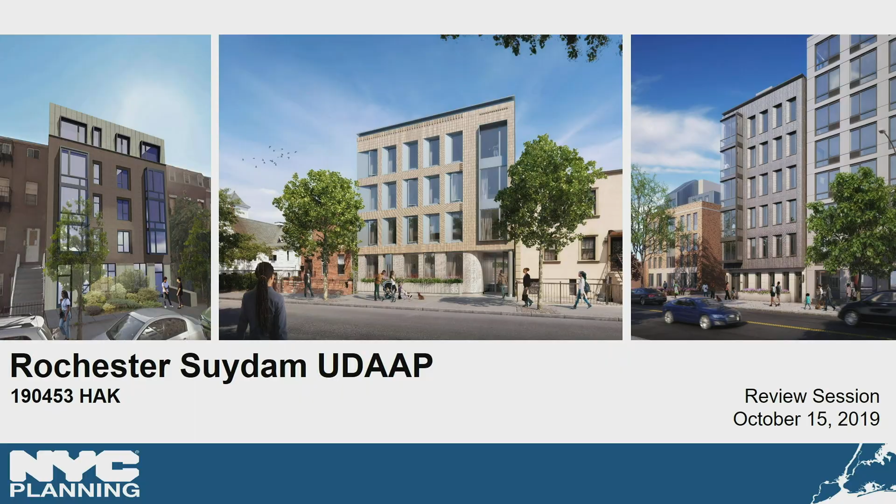Good afternoon, Commissioners. This is an application by the New York City Department of Housing Preservation and Development for a UDAAP designation, project approval, and disposition for 13 vacant city-owned lots to facilitate the construction of 7 residential buildings with approximately 78 units of affordable home ownership housing.

Can you turn your microphone down? Sure, is this better? The proposed developments are located in 3 clusters in the southern part of the Bedford-Stuyvesant neighborhood in Community District 3 in Brooklyn.

Broadly speaking, the project sites are in a mid-density residential neighborhood. They're all located between Fulton Street, which is a commercial corridor, and Atlantic Avenue, which is a main thoroughfare with elevated rail and auto-oriented uses. Significant institutions in the area include Interfaith Medical Center, just east of Cluster 1, and Boys and Girls High School, closer to the second cluster. All of the sites are well served by transit. As you can see on the map, they're all near subway stops, and they're also each near 2 bus routes.

Now we'll take a closer look at each of the clusters. Here we're looking at the westernmost cluster, which includes sites 1 and 2, located on Herkimer, just west of Albany Avenue. East of the sites is Interfaith Medical Center.

Much of the area around these sites, as well as the other sites in the application, was contextually rezoned in 2007 to the current zoning. Blocks along Fulton Street are generally zoned R7D with a C2-4 overlay, and the south side of Atlantic is largely zoned M1-1. The rest of the area is mapped with medium density residential and medium density contextual and non-contextual residential districts.

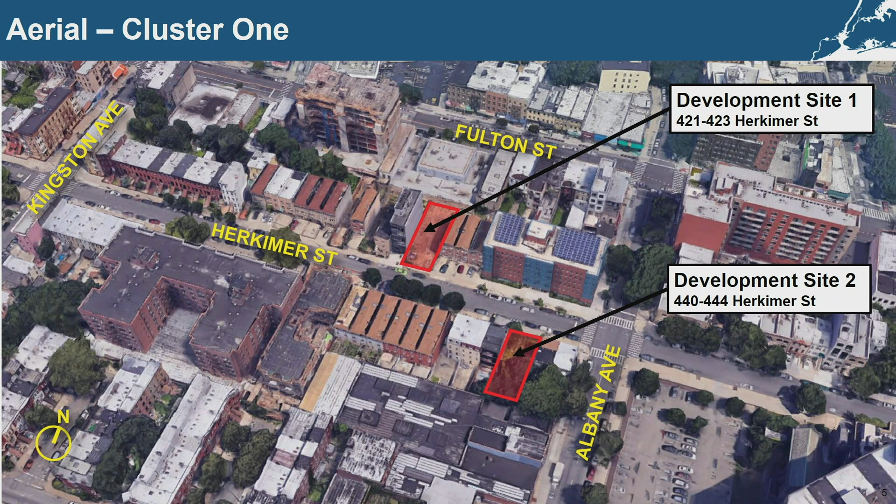Sites 1 and 2, seen here, are each comprised of 2 interior lots with 40 feet of frontage on Herkimer and a lot area of 4,000 square feet.

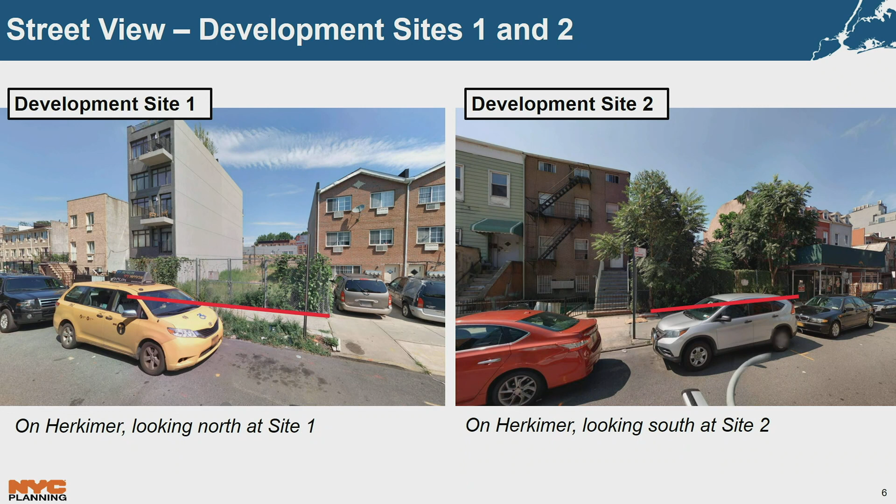The developments on these sites will be the same and built pursuant to R6A zoning. They'll be 52-foot tall, 5-story buildings with approximately 11,400 square feet and contain 10 units each. These will be 100% affordable buildings with a mix of 1- and 2-bedroom homeownership units.

All of the other developments in this application will also be affordable homeownership buildings with 1- and 2-bedroom units as well. Similarly, every building will also have an elevator and a landscaped yard that is accessible to all residents, and each unit will have its own washer and dryer.

Moving on to the next cluster, this is about a half-mile east of the last one and includes 3 development sites. The land uses here are generally the same, except the area also has a number of vacant lots. And instead of a hospital, the institutional uses here include a nursing home and several houses of worship.

The zoning here is also largely the same as in the previous cluster, though there's a small area along Atlantic that is zoned C4-3.

The sites in this cluster are all within an R6B zoning district, which allows 2 FAR for residential use and results in buildings with a street wall of up to 40 feet high and a maximum height of 50 feet.

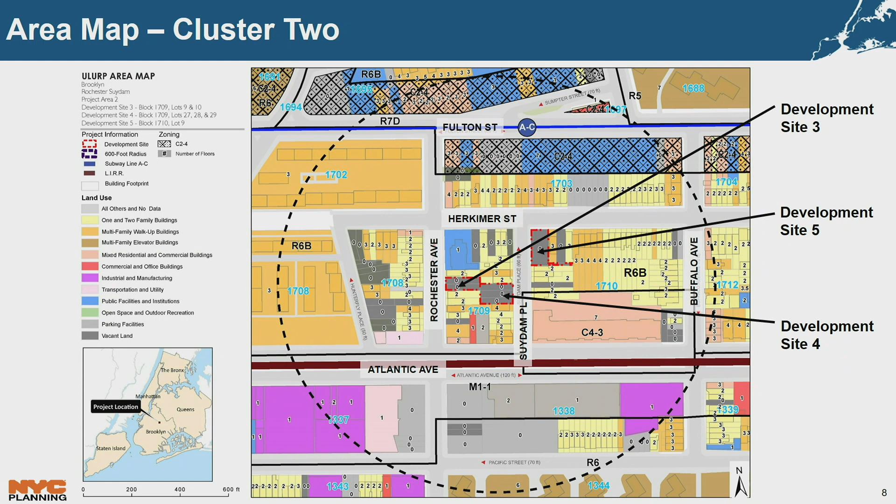Sites 3, 4, and 5 are all located just south of Herkimer Street on Rochester and Suydam Place. Most of the surrounding buildings are 2 to 4-story row houses and apartment buildings, but there are a couple 7-story buildings in the area.

So we're looking here at development site 3, which is located on the east side of Rochester Avenue, just south of Herkimer. It's comprised of 2 tax lots, has 42 feet of frontage, and an area of approximately 4,100 square feet.

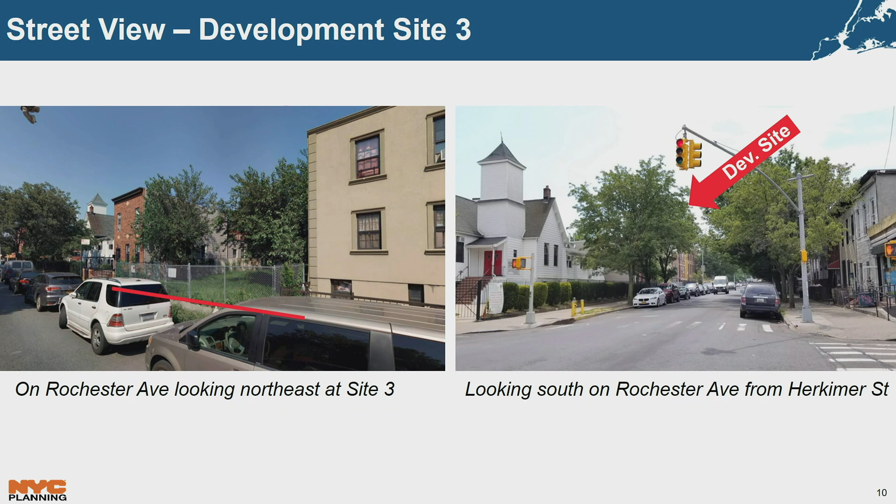The proposed development will contain 8 units and a 40-foot tall 4-story building that will total about 7,500 square feet.

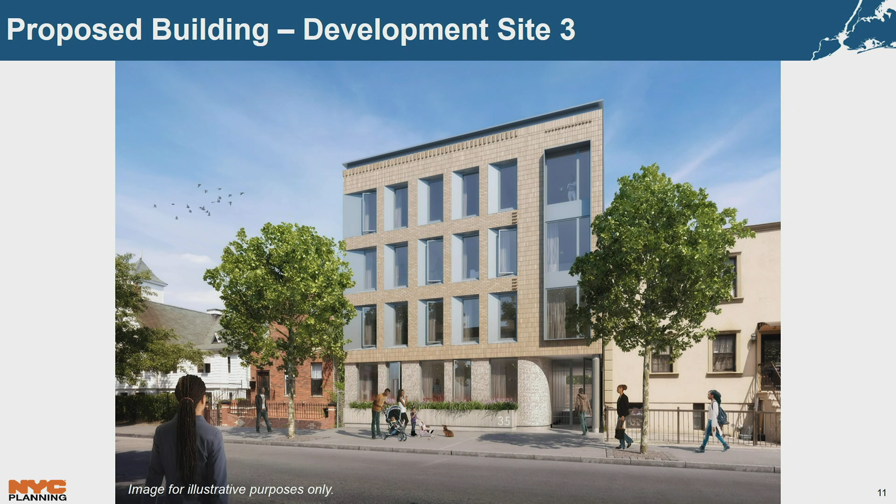The next site, number 4, is located on the same tax block but fronts on Suydam Place, 1 street east of Rochester. The site is made up of 3 tax lots with 63 feet of frontage and has about 6,100 square feet.

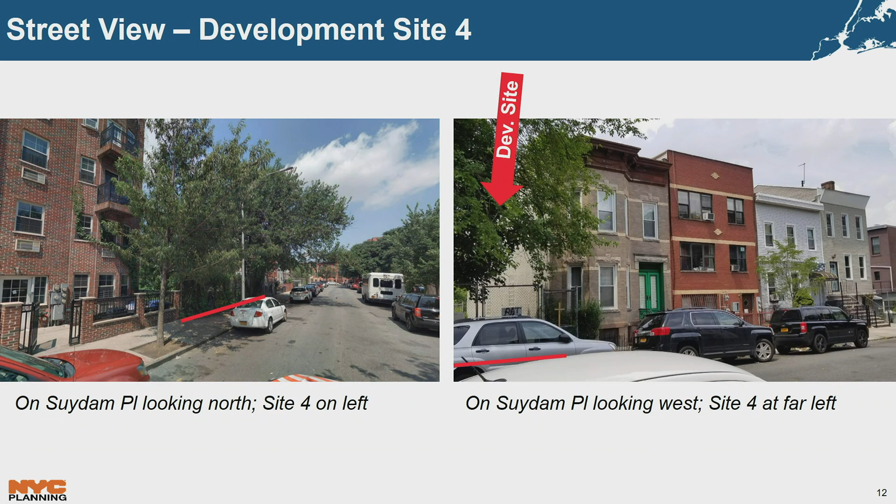The proposed development on Site 4 will contain 15 units and a 40-foot tall 4-story building with about 11,700 square feet. A zoning override was obtained for this development to waive the 8 parking spaces that would be required by zoning.

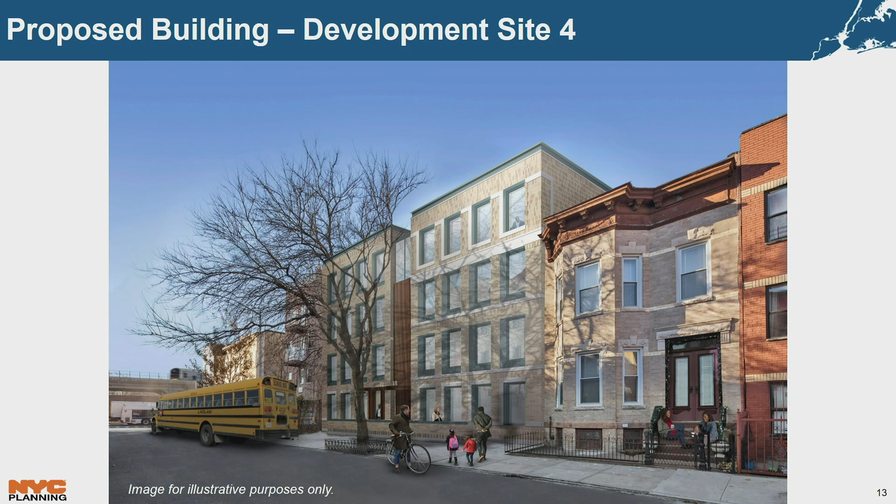Now, across the street and to the north is Site 5, which is an irregular corner lot with 52 feet of frontage on Herkimer Street and 105 feet along Suydam Place. The site area has a lot area of just over 6,000 square feet.

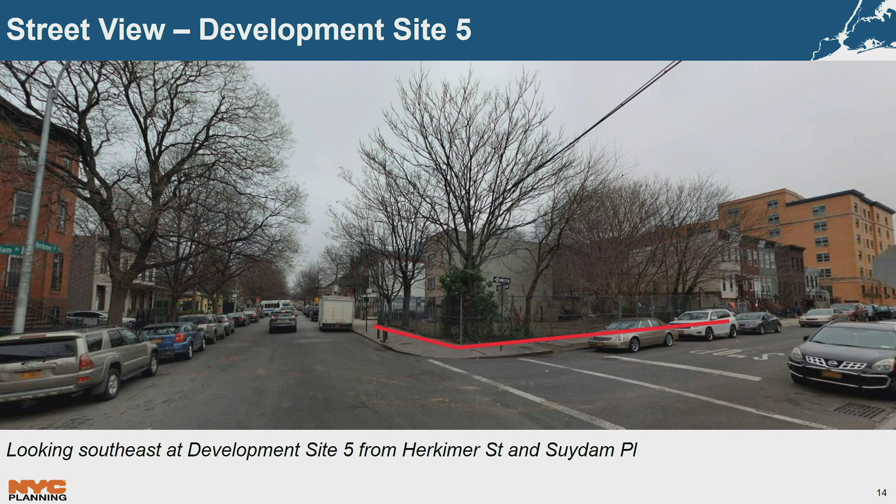The development for the site will also be a 40-foot tall 4-story building with approximately 10,700 square feet, and it will have 12 units. A zoning override was also obtained for this development to waive the 6 parking spaces that would be required by zoning.

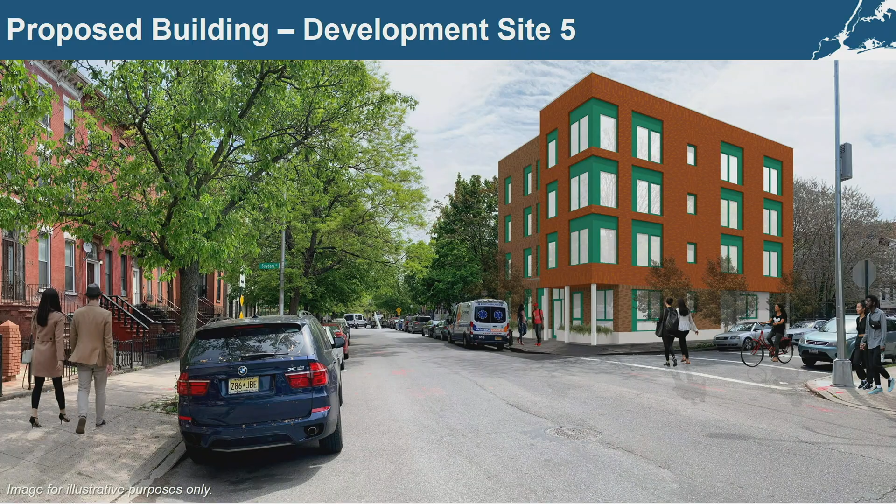So the last cluster includes 2 development sites and is located about 1/4 mile east of the previous one. The land uses here are similar to the previous cluster as well.

In terms of zoning, this area has an MX-10 special district with M1-1 and R7D districts mapped along Atlantic. And then there's also an inclusionary housing designated area that is coterminous with this special district.

Here, the development site 6 is in an R6B district, so it's subject to the same bulk regulations as sites 3, 4, and 5 that we just looked at.

Site 7 is within the MX10 Special District and is subject to the base bulk regulations of R7D districts. This allows for 4.2 residential FAR and 10-story buildings with an 85-foot base height and a 100-foot maximum building height.

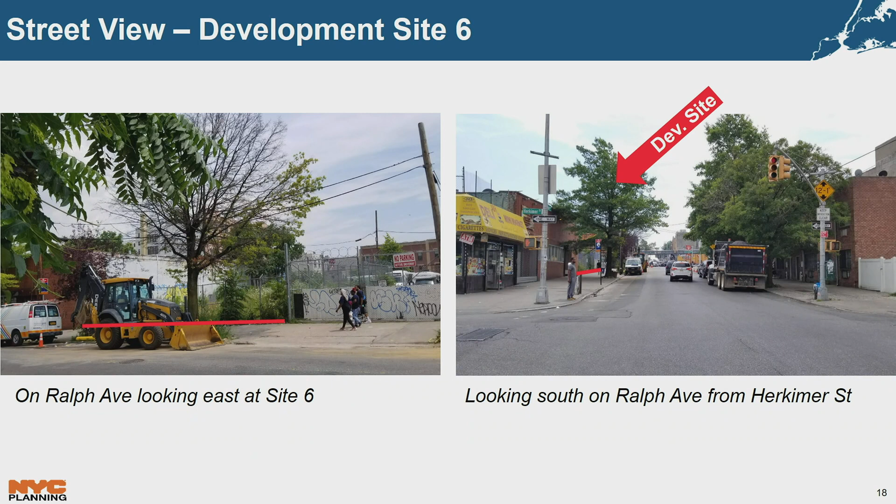Looking closer at site 6, this is made up of 2 lots with 50 feet of frontage and approximately 4,500 square feet of lot area.

The development that's proposed for the site is subject to the R6B zoning regulations and will be a 5-story building that's 49 feet 6 inches tall with 10 units and approximately 8,600 square feet.

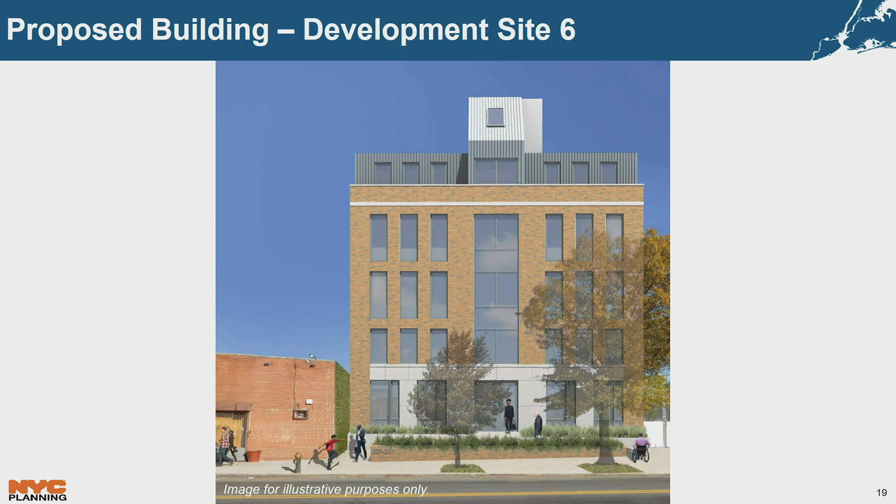The last site, which is on the same block, has 34 feet of frontage and an area of approximately 3,000 square feet.

This development will be built pursuant to the basic non-inclusionary housing regulations for R7D zoning. The development will be a 7-story building that will have a base height of 62 feet and a total height of 72 feet. It will contain 13 units and have approximately 12,200 square feet.

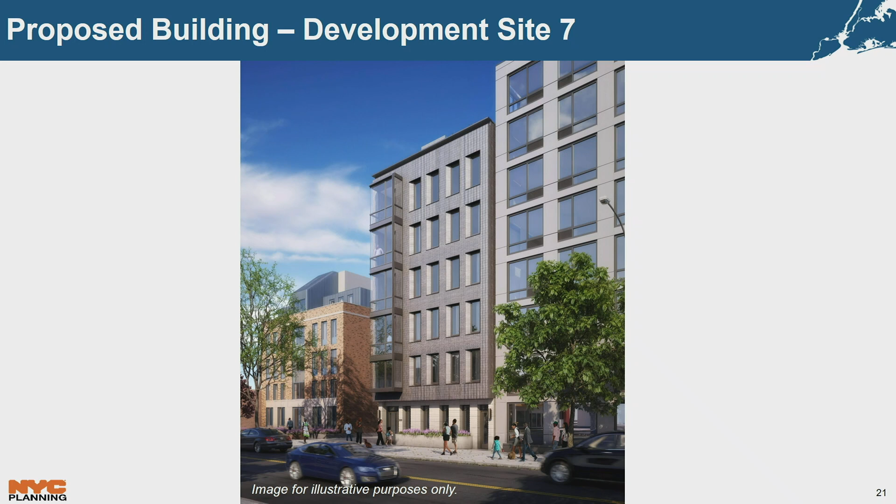So just to summarize, this application is for a UDAAP designation, project approval, and disposition of 13 city-owned lots to facilitate 7 developments with approximately 78 units of affordable homeownership housing. I'll now take any questions.

Questions from the commission? Vice Chair Nichols. Thank you. These would be condominium units as a home ownership, or has that been determined yet?

I can have the applicant speak to that. Okay, and affordability levels, you mentioned 100% affordable. What does that mean in terms of AMI? So these developments are all being built under the NIHOP program, which has an AMI range of between 80 to 130% AMI.

And do you know the AMI of the local area? The Bed-Stuy, the median household income of Bed-Stuy is $43,000.

Commissioner Burney. Could you just go back to the Herkimer Street, the renderings of the Herkimer Street? Just because I saw that first. Sure. Yeah, that's fine. So, I mean, I've mentioned this before, but I just have a lot of concerns about

the planting in front of these buildings, because we have a very poor track record of these things surviving. They're never well maintained, and they just become a nuisance. And I'm all for planting some trees on the sidewalk, and I understand they're probably concerned about screening the residential units that are there, but these planters are just not really a good solution.

I can definitely take that concern to the applicant. Other questions?

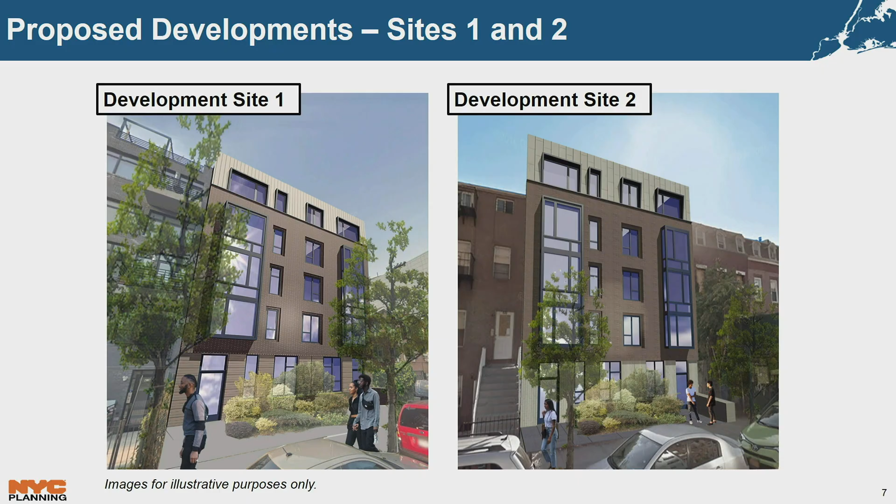Commissioner Levin. Is there a developer or developers chosen yet? Yeah, the development team is a partnership between Job Development Corporation, Fulcrum Properties, and the Briarwood organization.

Okay. And is there a possibility that sites 6 and 7 get combined? Is there a vacant space in between the two of them? That lot is part of a lot that extends to the other side of the block.

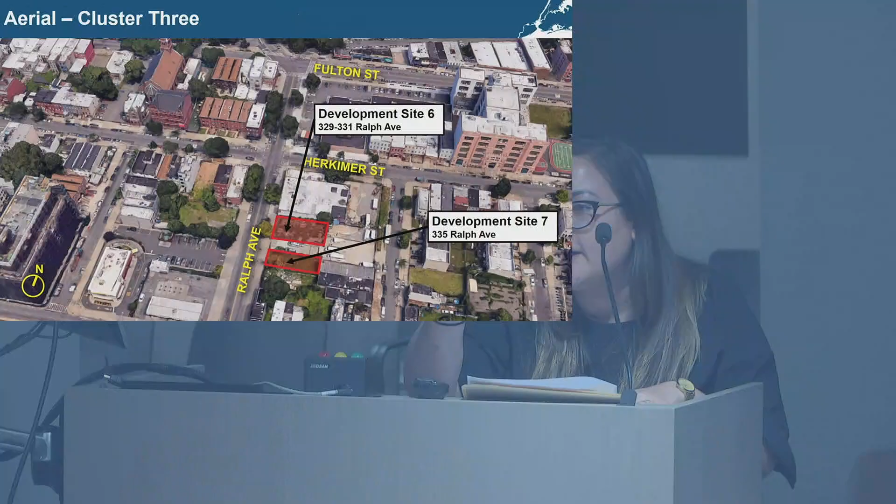I can definitely call it up on the screen, sure. Yeah. Oh. Well, that kind of shows it, yes. So that lot is part of a lot that extends to the other side behind development site 6 that's currently used for parking of large trucks. Okay. So it may have some potential, or maybe it doesn't.

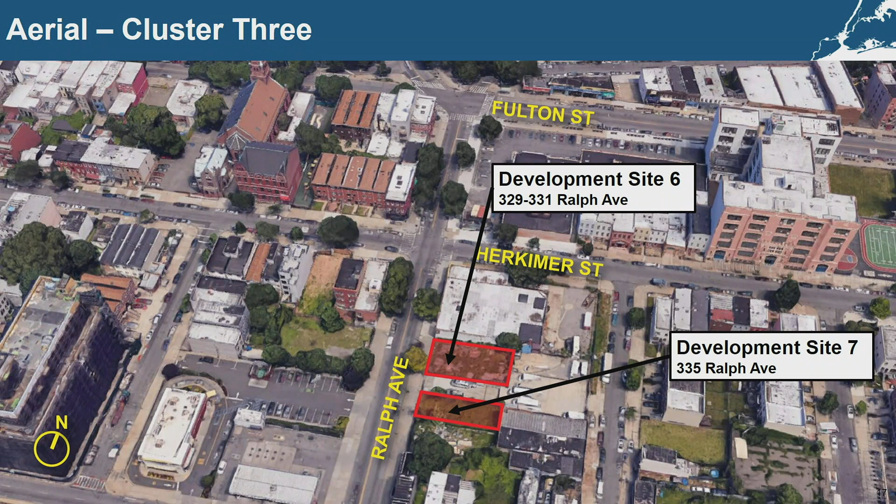It's not city-owned in any event. Okay. Thank you. Commissioner Villalobos. Can you go to site 6 and 7 for a sec? The area map, not the rendering, the area map that kind of shows the little piece of, next one over, I think.

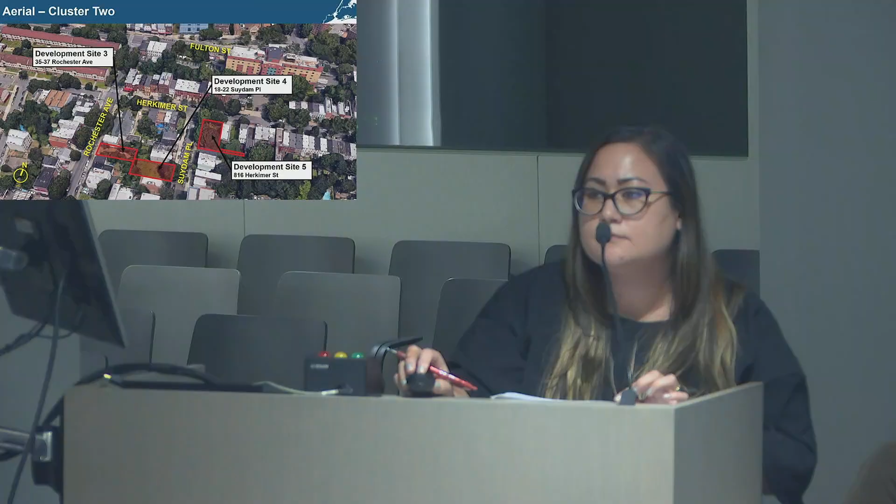This one? I guess it's actually 3, 4, and 5, I'm sorry. Okay, there you go, that one. So the little piece of land that's going into the adjacent yard, I'm assuming that there's actually not going to be development on that, and instead the little bit of FAR is going to be transferred. Is that what's happening? For site 5?

Yeah, 816 Herkimer? Yeah. So that little piece of land extension, on the south, that's part of the yard. The development is located more on the northern part of the site. I guess the question is whether it's going to actually be used or not, so if that question can be answered when it comes back. Yeah. Thanks.

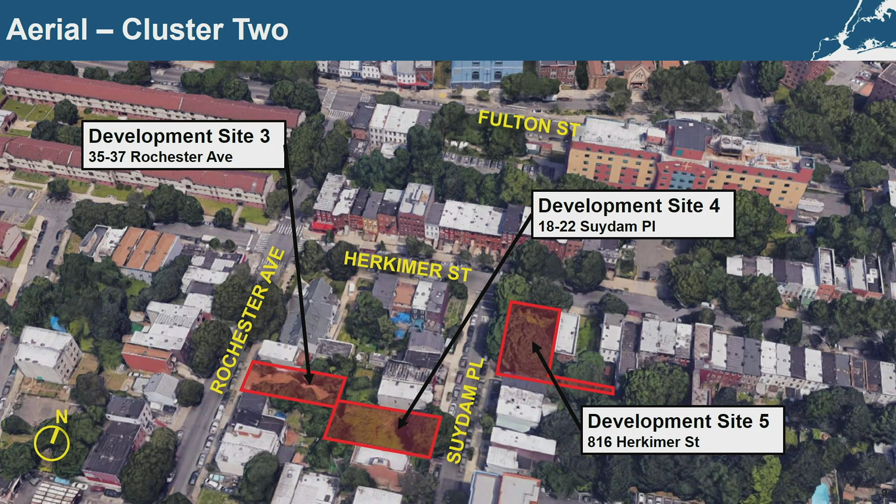Other questions? Okay, the application is certified.

The second item on the agenda, page 60, is a certification of zoning map and zoning text amendments in Brooklyn Community District 2. Our presenter is Kevin Kraft.

All right. Good afternoon, Commissioners. This is a private application by 90 Sands Street Housing Development Fund Corporation, an entity controlled by Breaking Ground, a nonprofit provider of supportive and affordable housing, requesting a zoning map amendment and zoning text amendment to facilitate the conversion of an existing 29-story former hotel to supportive and affordable housing classified as a community facility use.

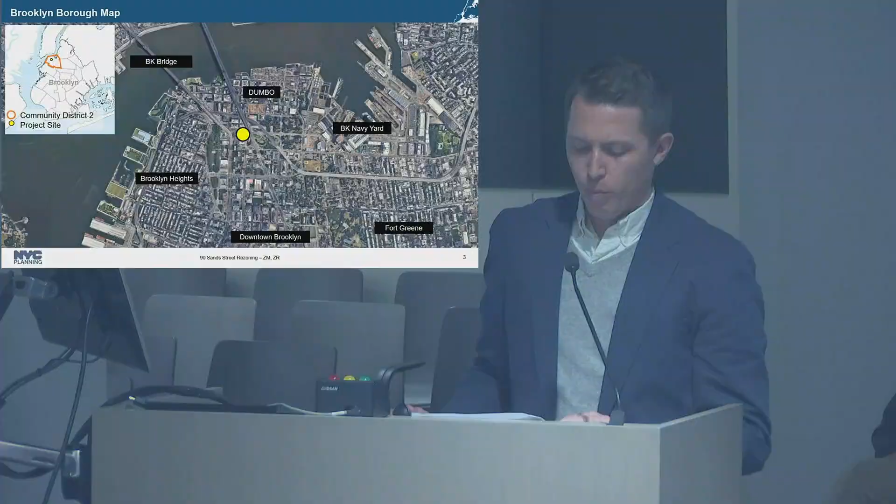The proposed project area is located within the Dumbo neighborhood of Brooklyn, Community District 2. The site is located between the Manhattan and Brooklyn bridges, just north of downtown Brooklyn.

The proposed rezoning area is an approximately 42,000 square foot single block that consists of 2 tax lots, Block 87, lots 5 and 9. Lots 5 and 9 are under separate ownership and comprise a single zoning lot that has an allowable FAR of 11.08. The block is bounded by the 160-foot wide Sands Street to the north, Jay Street to the east, High Street to the south, and Pearl Street to the west.

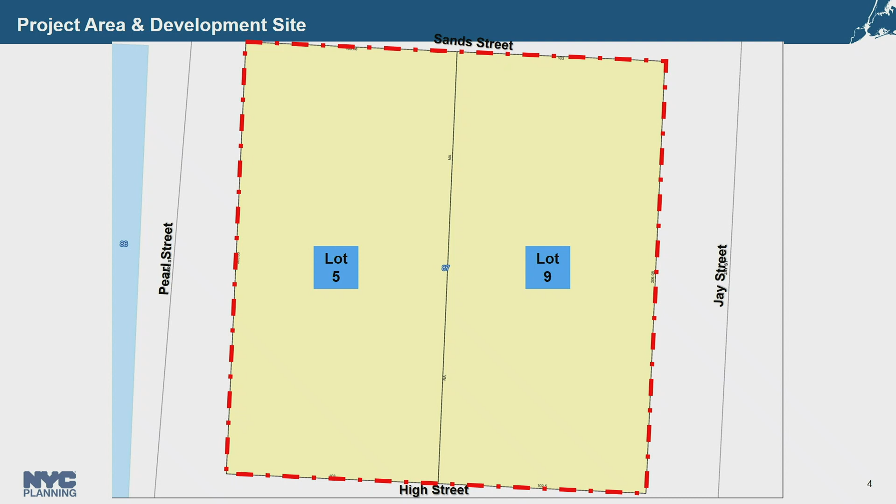The applicant-owned site, Lot 9, is an approximately 21,000 square foot lot currently occupied by the 90 Sands Street building, a vacant 29-story, approximately 329-foot tall building built in 1993 by Watchtower, an organization of the Jehovah's Witnesses. The building was formerly used as a hotel to house Watchtower members. There are a total of 508 units, as well as a commercial kitchen, all of which are vacant.

There is also an existing 7,600 square foot public plaza on the eastern portion of the lot along Jay Street. The provision of the plaza permitted a 1.08 FAR bonus to the zoning lot. Lastly, in 2018, the applicant and HPD recorded two regulatory agreements against Lot 9, requiring that the existing building

be rehabilitated and used for supportive and affordable housing. Lot 5, the non-applicant-owned site, is an approximately 21,000 square foot lot with frontage on Sands, Pearl, and High Streets.

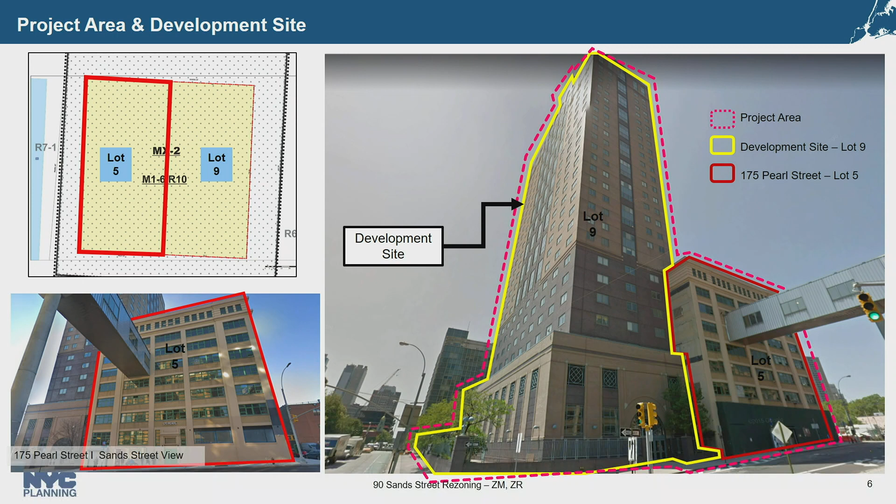This lot is developed with an 8-story commercial loft building that was renovated into a Class A office building in 2017, and is part of the larger Dumbo Heights office complex to the north, connected by an existing sky bridge across Sands Street. This lot is not expected to redevelop due to the proposed zoning change.

The surrounding area contains a mix of uses, including medium and high-density residential, commercial, and community facilities. Commercial office uses are concentrated north of the project area, primarily located in medium to large loft buildings. Dumbo Heights, a 5-building, 1.2 million square foot campus comprised of office, retail, and high-tech space, home to companies such as Etsy, is located within the project area and north of it across Sands Street.

Immediately to the south, across High Street, is the New York City College of Technology CUNY Voorhees Hall, an 8-story academic building. To the west is the 3-story academic building that houses CUNY's Environmental Center. Beyond Adams Street is the New York City Emergency Management Department offices, and further to the southwest is the U.S. District Court.

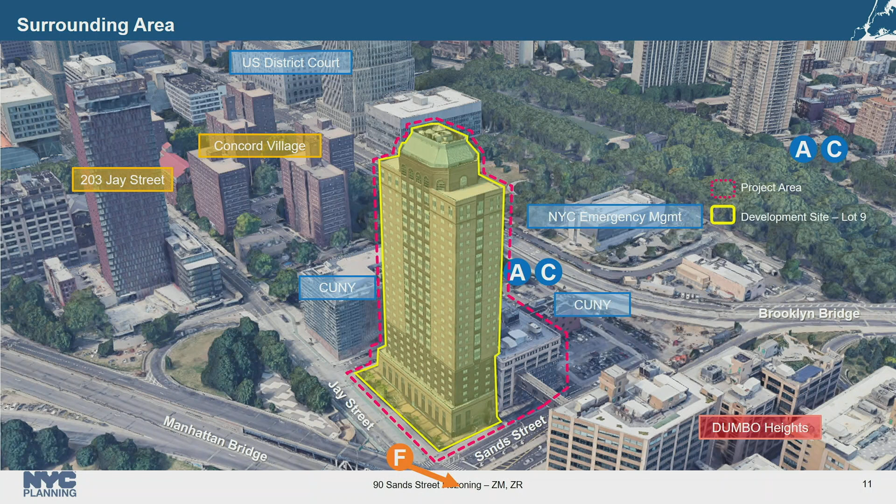To the south is Concord Village, a roughly 1,000-unit condo complex of 7 15-story towers surrounded by parking lots. Southwest of the project area is 203 Jay Street, a 33-story residential building with a hotel in the base, constructed in 2015.

Open spaces in the area include Trinity Park. Directly across Jay Street from the project area is Manhattan Bridge Small Park. Approximately 4 blocks to the southwest is the roughly 3-acre Walt Whitman Park. Further west is Cadman Plaza Park, a 10.3-acre park.

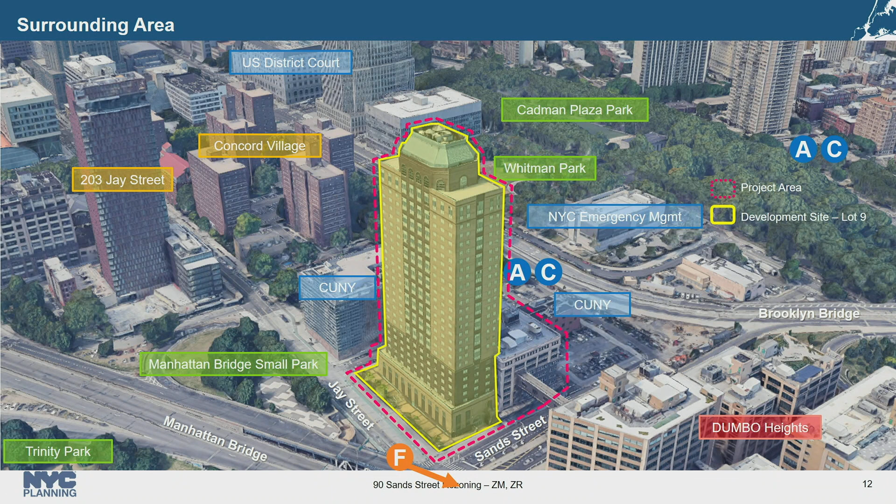The area has access to the F train at the York Street Station 3 blocks to the north, as well as the A and C trains at the High Street Station, which is less than a block to the west. The area is also served by the B67 and B69 bus lines.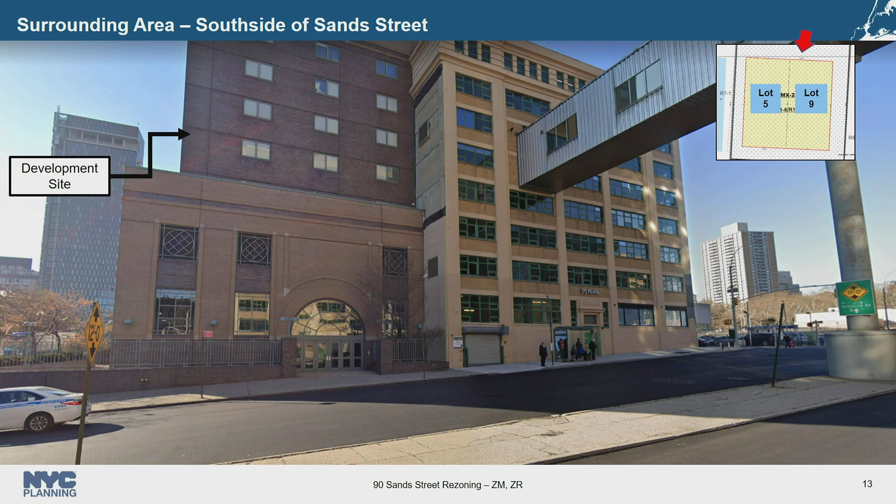This is a view looking at the south side of Sands Street at the project area. On the left-hand side you have the development site, and on the right-hand side the office building located on Lot 5. You can see the bridge crossing over Sands Street.

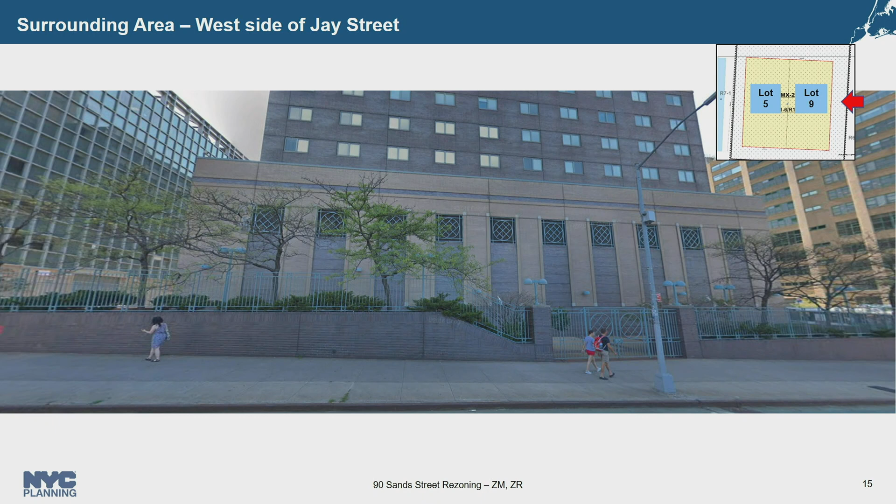This is looking at the west side of Jay Street at the existing plaza that's currently gated, but it is the applicant's intention to open it up for public use. They'll be coming forward with a chairperson certification in the future, and are currently still working on the design of that space.

This is looking at the east side of Jay Street at Manhattan Bridge Small Park, as well as the pedestrian entrance to the pedestrian pathway on the bridge.

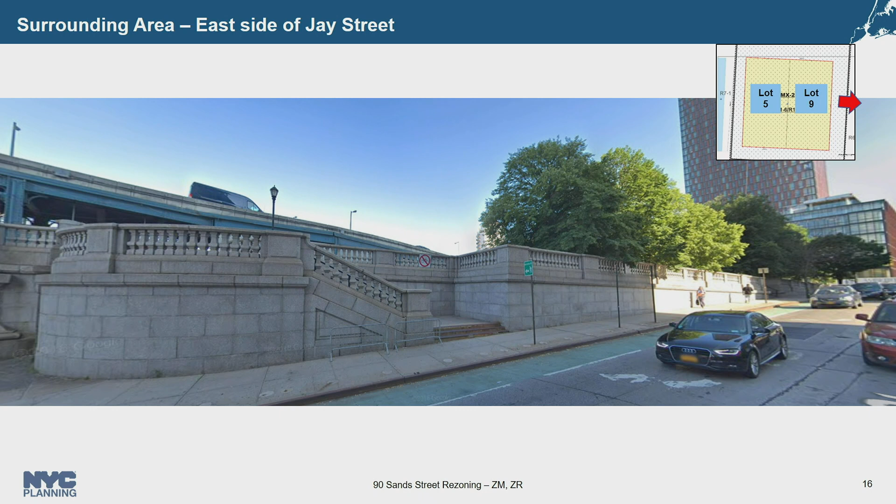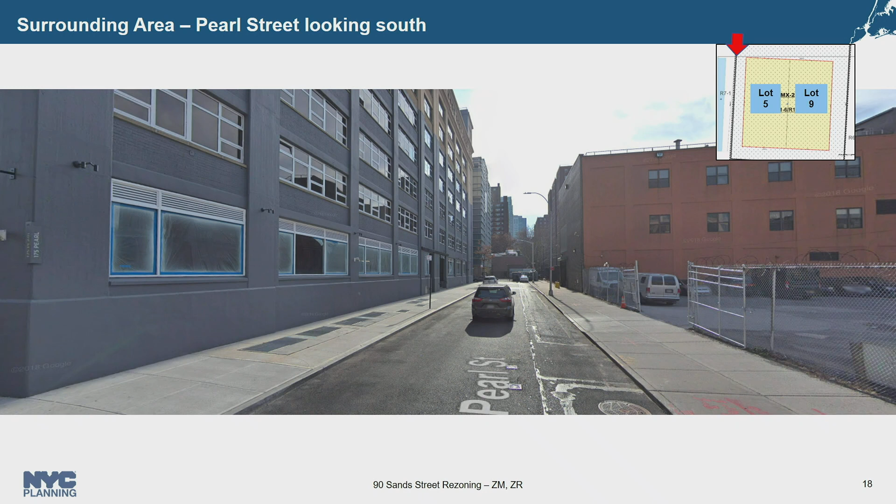The project area and immediate blocks to the north are located within an M1-6 zoning district. M1-6 districts allow a variety of commercial and light manufacturing uses, as well as heavier industrial uses subject to stringent performance standards. Building heights are regulated by a sky exposure plane that begins at 85 feet above the street line.

Further to the north, beyond the elevated Brooklyn-Queens Expressway, is the MX2 Special Mixed-Use District in Dumbo. This was established in 1999 as Brooklyn's first special mixed-use district. Non-contextual residential R7-1 and R7-2 districts are located to the south and west of the project area.

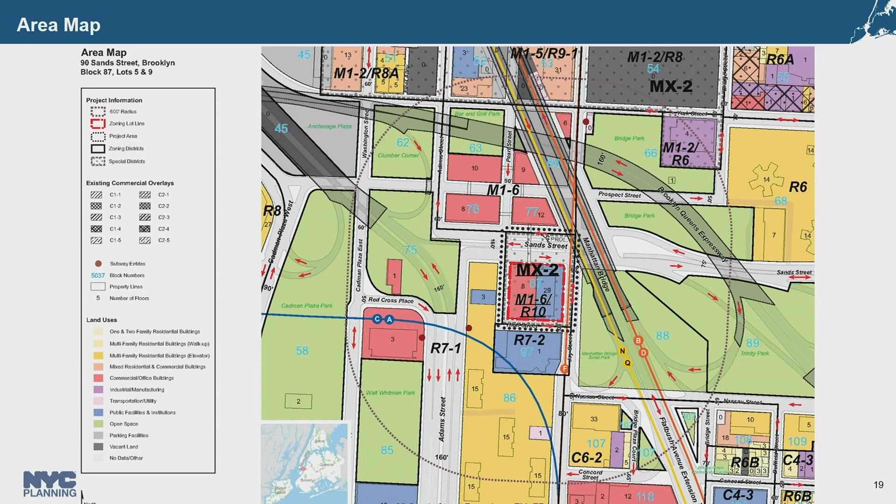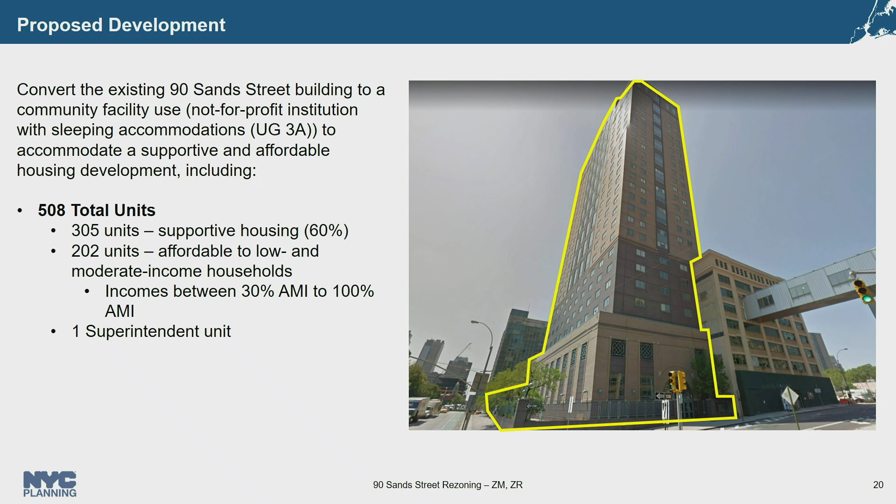The applicant is proposing to convert the existing 90 Sands Street building on Lot 9 to a community facility use to accommodate 508 units of supportive and affordable housing for low and moderate income tenants. The proposed project would include 305 units, 60% for supportive housing for the formerly homeless, and 202 units affordable to low and moderate income households with incomes ranging from 30% AMI to 100% AMI.

The lower floors would be renovated to create tenant amenities and office space for the building management and social services. This would include a reception desk with security staff on site 24/7, along with a community room for use by building residents. Other amenities would include a laundry room, fitness room, and computer lab.

In addition, the applicants intend to lease the lower cellar level to a tenant that would provide a community facility, commercial or light industrial use, but that tenant has not yet been identified.

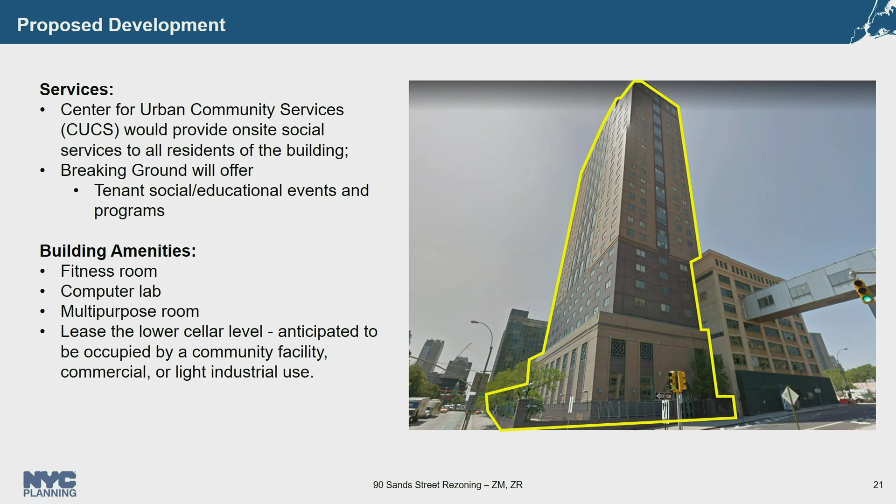The Center for Urban Community Services would provide on-site social services to residents of the building, including case management, primary medical care, mental health services, employment readiness guidance, and benefits counseling. And as I mentioned, the applicants will be seeking a chairperson certification to update the public plaza.

In order to facilitate the proposed project, the applicant is seeking the following actions. First, the applicant proposes a zoning map amendment to rezone the project area from M1-6 to an M1-6/R10 district within a special mixed-use district.

The proposed mixed-use district would expand the range of permitted uses and would allow the existing 90 Sands Street building to be occupied by a Use Group 3A, community facility nonprofit institution with sleeping accommodations, which is not currently allowed in the M1-6 district. The proposed mixed-use district would maintain the existing permitted base FAR of 10, or up to 12 for including a public plaza or arcade.

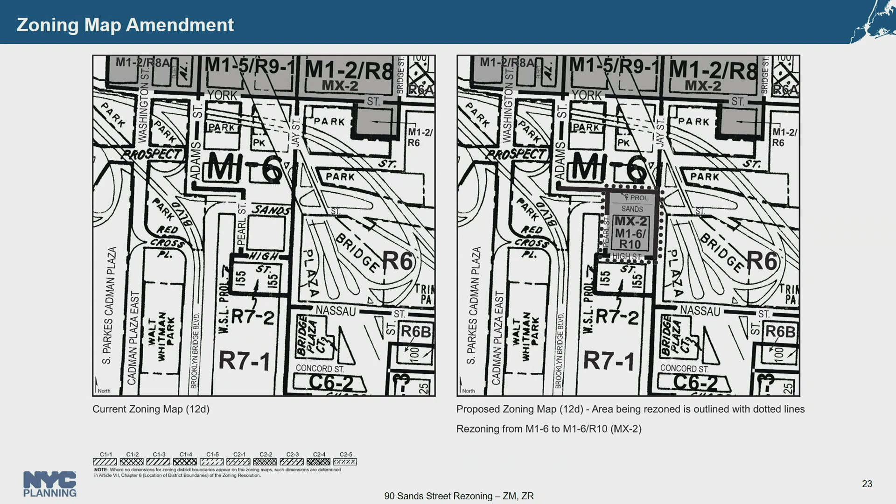Any residential use would be required to include MIH affordable units at 12 FAR. And lastly, the applicants are proposing a zoning text amendment to Appendix F of the zoning resolution to create a mandatory inclusionary housing area coterminous with the proposed rezoning area.

The applicants are proposing to map both MIH Option 1 and 2. However, it should be noted the applicant's proposal is not subject to MIH because they are classified as a community facility use. Thank you, happy to take any questions.

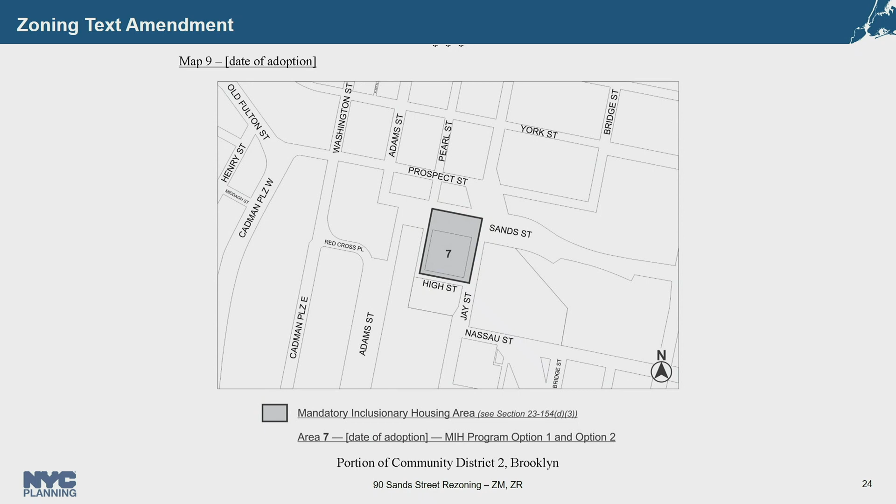Questions from the commission? Commissioner De La Uz.

First, I think this is a great use for this building, considering the need that exists for supportive housing and affordable housing. And what the past use was, I'm hoping that means the cost per square foot isn't that big a deal.

I heard what you said about since this property, this project won't be subject to MIH, I'm just wondering then why we're thinking of mapping 1 and 2 in the event that the adjacent property in some future were to be redeveloped. It seems to me that the greatest need would continue to be for the more deeply affordable option rather than 2, especially given this community board. So that's the one thing I would ask HPD and the applicant to consider as it moves forward.

Do you want to give some history of the site? Yeah, I'd be happy to. The Lot 5 office building, as I mentioned, was redeveloped in 2017 as Class A office space, so it's highly unlikely. So mapping both options now just allows a little bit more flexibility should a future residential use want to come in the future.

But we could, definitely relay it to prior HPD use of the current building. Hotel. Okay, I'm very well aware. I just wanted everyone to be aware that it's very well configured because of its prior use.

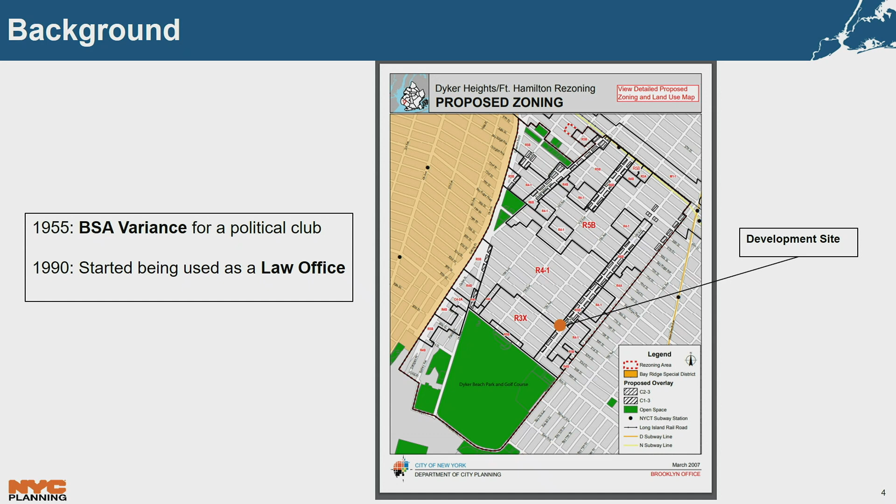Just clarifying, the BSA variance was not for use. The use was permitted at the time. This is pre-1961, and the certificate of occupancy lists it as a club. So the variance was for the bulk. At the time, the maximum permitted area was 55%, and the existing building uses close to 72%.

So the project area is comprised of 3 lots, approximately 10,000 square feet. The development site is marked in red and has a 40-foot frontage along 13th Avenue and 100 feet deep, comprising 4,000 square feet.

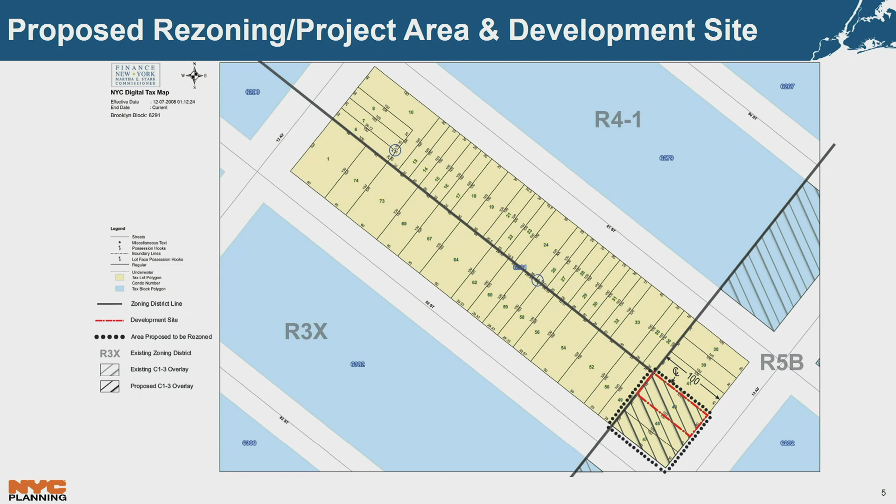The surrounding land uses are mostly residential, 2 to 3 stories, comprising single-family homes, detached 2 to 3-storied single-family homes, and 3-storied row houses. Community facilities in the area include Junior High School 201 just a block to the northwest. Just south of the project area is the Dyker Heights Library, and diagonally across is a house of worship. Just a couple of blocks down is the post office, and 4 blocks south is the 214-acre Dyker Beach Park, which contains recreational facilities, sports fields, and also a golf course.

The existing zoning is R5B, which is primarily a 3-story contextual residential district, permitting detached and semi-detached row houses, with a maximum of 1.35 FAR and a maximum building height of 33 feet.

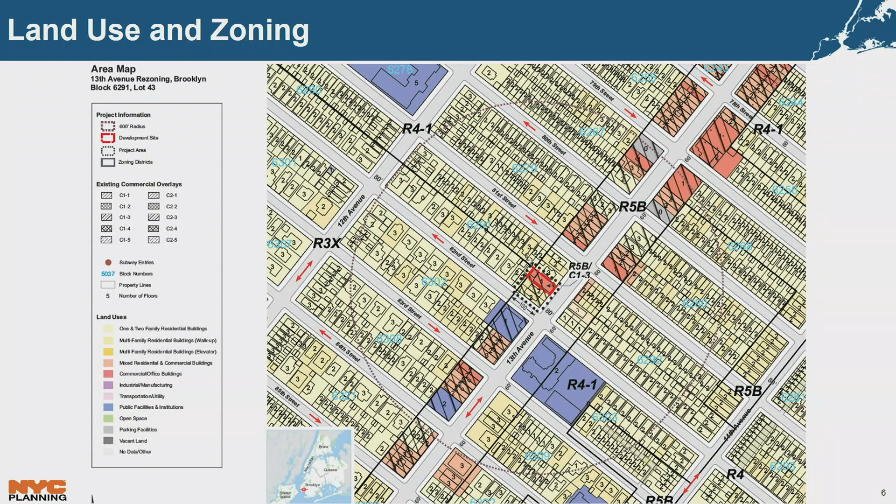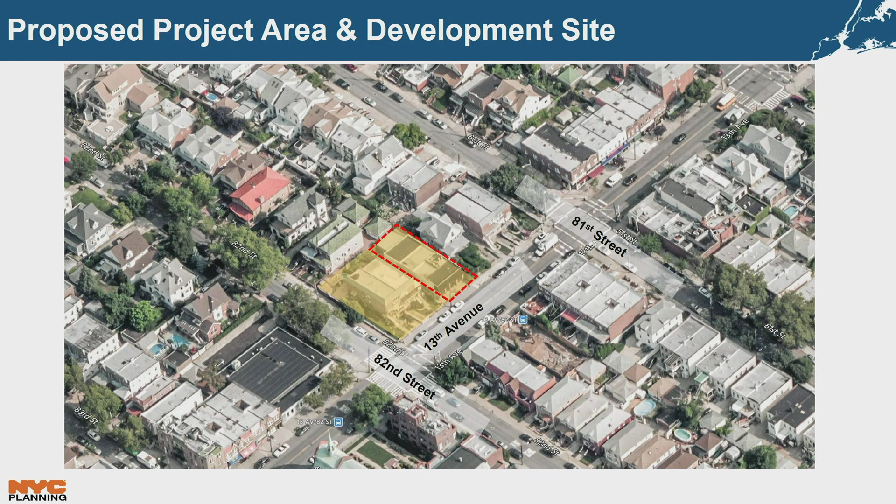This shows further the character of 13th Avenue, which is a very nice street thoroughfare. It's a wide street, with local retail made of restaurants, salons, and medical offices. The applicant states that the existing use, which is a law office, would be in context and consistent with the rest of the character of the uses along 13th Avenue.

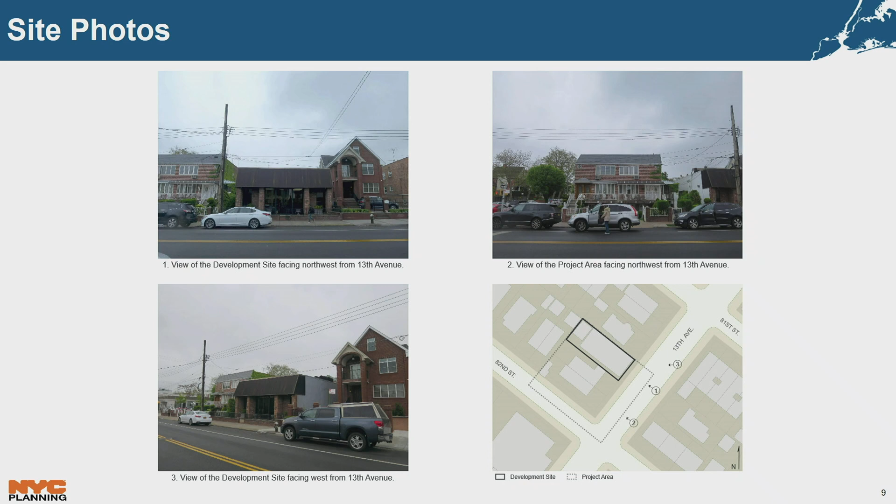In order to facilitate the legalization of this law office, the applicant is proposing a zoning map amendment to allow for mapping a C1-3 commercial overlay over the existing R5B district. The proposed zoning would not increase the maximum permitted commercial FAR or the maximum permitted FAR for this site, or change the bulk residential regulations as they currently exist. In closing, the applicant is seeking the proposed rezoning to facilitate the continued use of a productive law office which serves this community. Thank you.

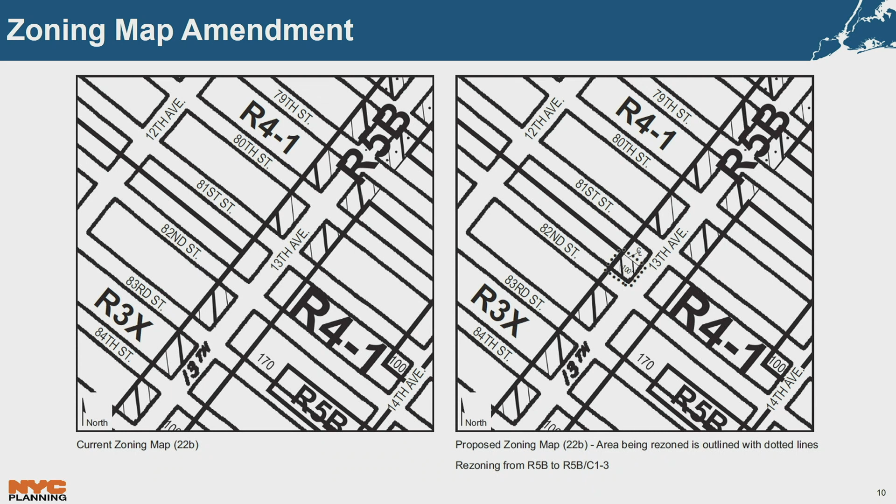Questions from the commission? Commissioner Levin: Thank you, Sanmani. I'm just curious, why now? The applicant's father passed away in 2013, and sometime after, the applicant's mother was going through the paper records, found the certificate of occupancy, and found out that the law office, which was at the time allowed, is no longer conforming. They just wanted to straighten out their affairs.

And then probably the bigger question is, if you look up and down that whole block, why doesn't this block have the commercial overlay? It's because this is the only commercial use on the block. Right, and so at that time it must have been left out. Okay, good, thank you. Usually we have concerns when we see an application after the fact, but this one actually brings a smile to your face, of the widow wanting to do the right thing.

Other questions? Okay, the application is certified. Thank you.

The fourth item on the agenda, page 96, is a certification of a zoning map and zoning text amendments in Queens Community District 2. Our presenter is Scott Solomon.

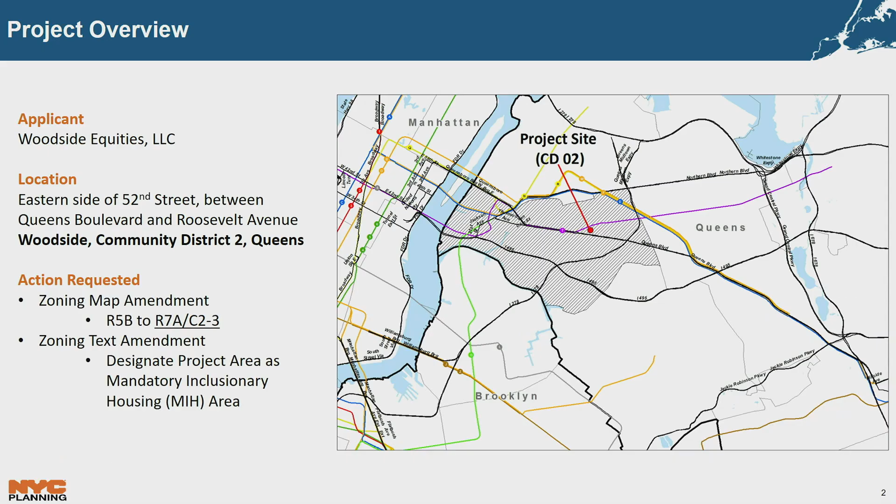Good afternoon, Commissioners. Woodside Equities LLC seeks approval of a zoning map amendment for the entirety or portions of 11 tax lots from an R5B to R7A C23 district to facilitate development of an 8-story mixed-use building in the Woodside neighborhood of Queens Community District 2.

A zoning text amendment is proposed to designate the area as a mandatory inclusionary housing area.

Brief background: the project area, located on the eastern side of 52nd Street between Queens Boulevard and Roosevelt Avenue, was rezoned from R6 to R5B in 1992 as a result of the city-sponsored Woodside rezoning. In 2006, the Maspeth Woodside rezoning changed the M1-1 district west of the project area to R6 C23 and the C8-1 along Queens Boulevard to R7X with the C23 overlay. It also established the borough's first inclusionary housing designated area along the R7X corridor along Queens Boulevard. The project area was not affected.

Following in 2011, the Sunnyside Woodside rezoning added density with contextual components to the areas north and west of the project area. Again, the project area was not affected.

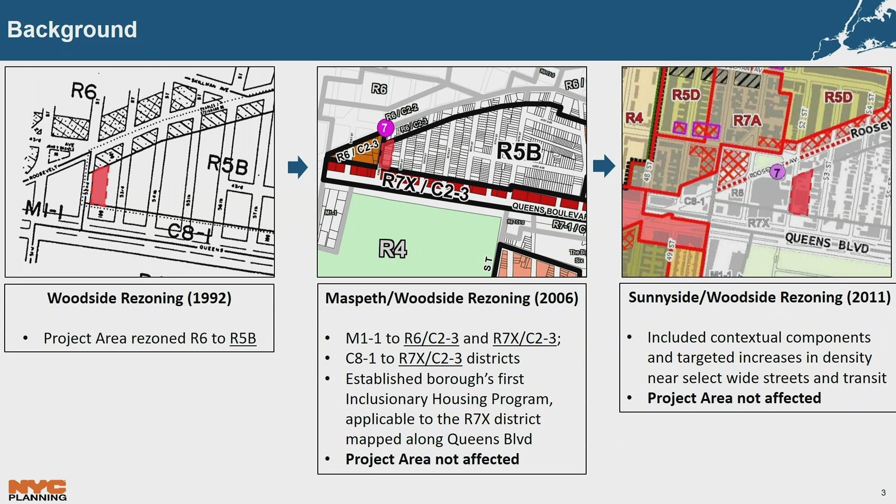The surrounding area is characterized by a mix of use groups and densities. In the R5B district, including the area east of the project area, the dominant typology is low-rise 2- to 4-story residential buildings. Following the 2006 rezoning, there are several 7- to 9-story mixed-use buildings located within the R7X district, mapped along Queens Boulevard. Within the R6 C23 district, mapped to the west and north of the project area, there are several commercial buildings with second-floor residential.

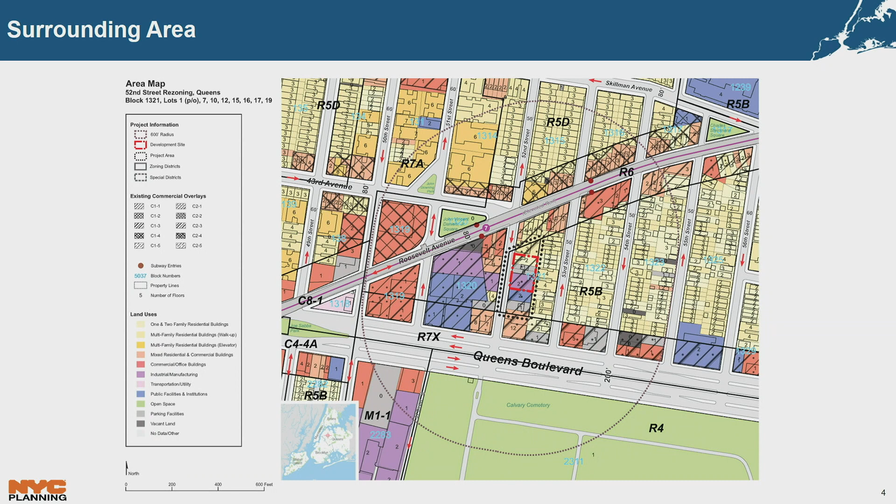An as-of-right 6-story mixed-use building will be replacing an industrial building located across the street from the project area. There are several mixed-use buildings planned or under construction currently within the R6 district along Roosevelt Avenue. 4- to 5-story residential and mixed-use buildings are located along Roosevelt Avenue. Ground floor retail uses are located along Queens Boulevard and Roosevelt Avenue, and south of Queens Boulevard is the 106-acre New Calvary Cemetery.

The project area is well served by public transit. It is located just south of the 7 line 52nd Street subway station, and several local and express bus routes serve Queens Boulevard and Roosevelt Avenue.

The project area consists of approximately 33,000 square feet across all portions of 11 tax lots. The development site owned by the applicant occupies lots 12, 15, 16, and 17, totaling approximately 15,000 square feet. Lot 12 is occupied by a warehouse that has been vacant since 1996. At that time, the applicant, who owns a baby clothing and accessories company, moved their warehouse to Jamaica. Since 1996, it's remained vacant.

The 2 lots south of the development site, lots 10 and 7, are occupied by a 2-story house of worship and a non-conforming auto repair shop. The southernmost lot, Lot 1, is only partially within the project area and is used for access and egress for parking and loading in the rear of the 9-story residential mixed-use building fronting Queens Boulevard. Zoning compliance will not be affected.

North of the development site on Lot 19 is a 3-story multi-family residential building built in 2005. The northernmost end of the project area includes approximately 1,200 square feet of the rear portions of the properties facing Roosevelt Avenue.

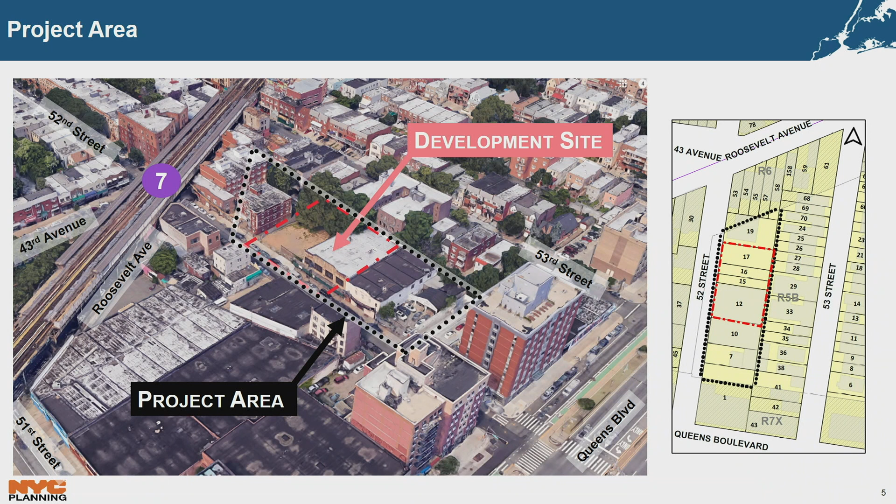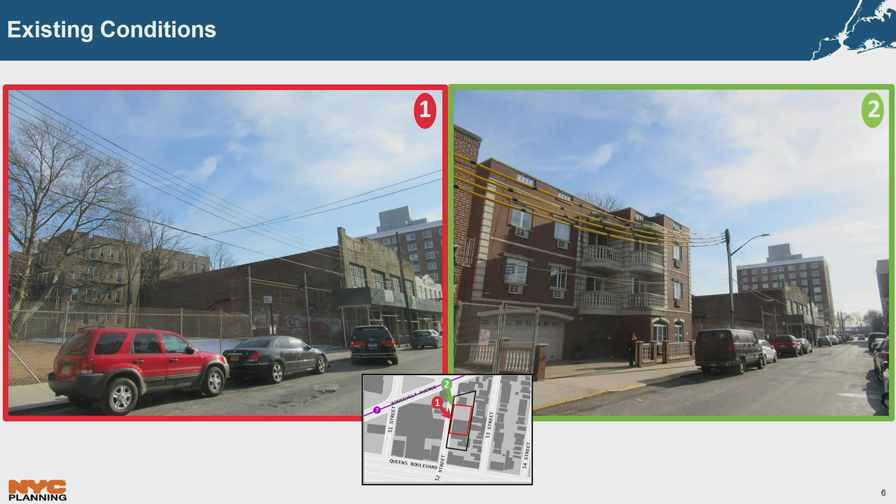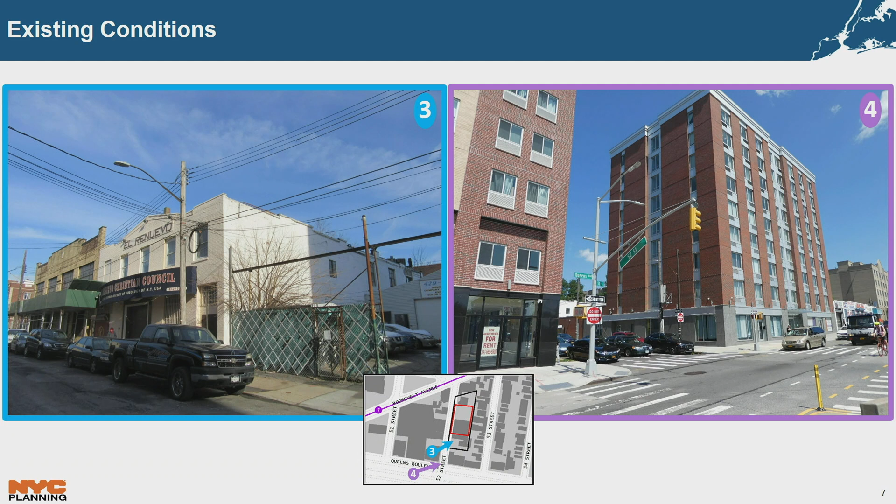You see existing photos here: photo on top left with the warehouse and vacant lots within the development site. Photo 2, the 3-story residential building to the north of the development site. Photo 3, you see the house of worship to the right of the existing vacant warehouse with the auto repair shop next to that, and 2 mixed-use buildings fronting Queens Boulevard within the existing R7X district. Looking straight in on those 2 properties into 52nd Street from Queens Boulevard. The same properties looking west, you'll see a 9-story residential building that was, as of Friday, being constructed.

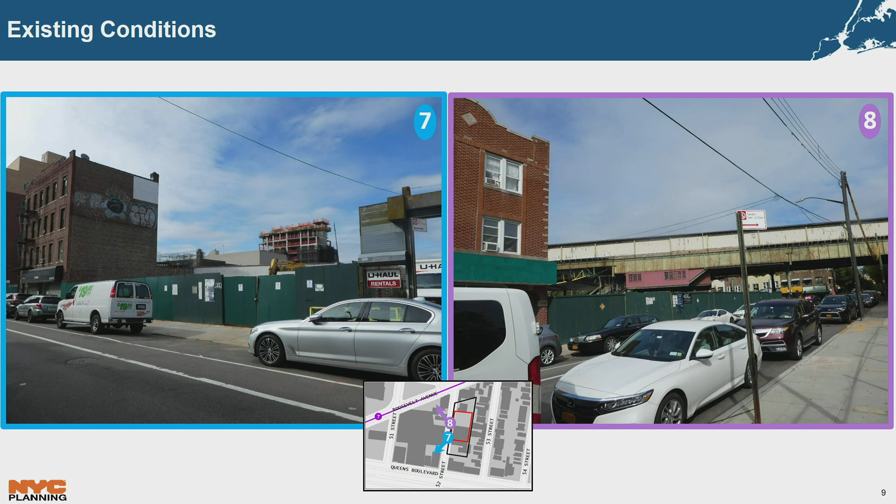In terms of the proposed development, the proposed actions would facilitate an 8-story mixed-use building, approximately 63,000 residential square feet across 61 dwelling units, and a 5,300 square foot ground floor retail space. Approximately 15 to 18 units would be pursuant to MIH. No specific commercial tenant has been identified yet.

49 parking spaces are provided, however fewer are required. The site is within a transit zone, which requires no off-street parking spaces for the income-restricted units. 50% of all other units are required to provide parking, and one space for every 400 commercial square feet.

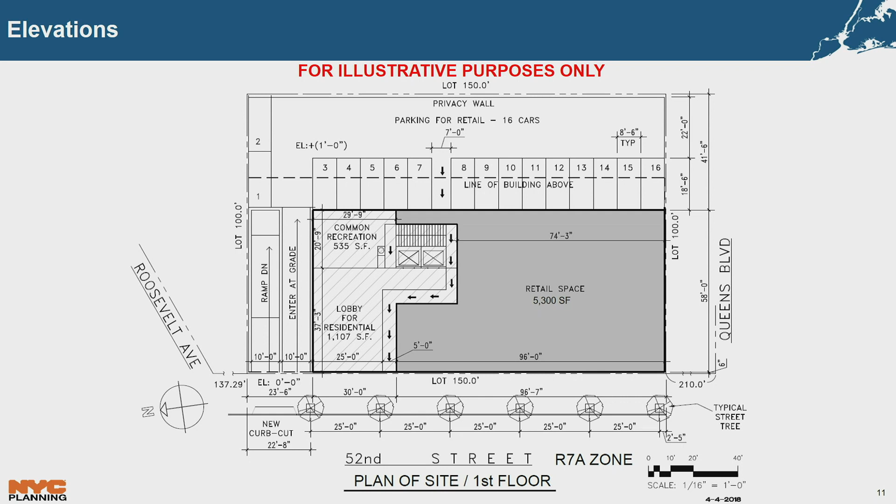Parking access and egress would be through a new curb cut on the left, located at the northern end of the building. Parking is located in both the rear and cellar. Here you see the curb cut on the left, with the parking located in the rear yard of the building. The rest of the parking space is located in the cellar.

Elevations indicating the proposed building would have a maximum base height of 60 feet, 65 would be allowed, topping out at a maximum permitted building height of 80 feet. As proposed, it would utilize the maximum FAR of 4.6.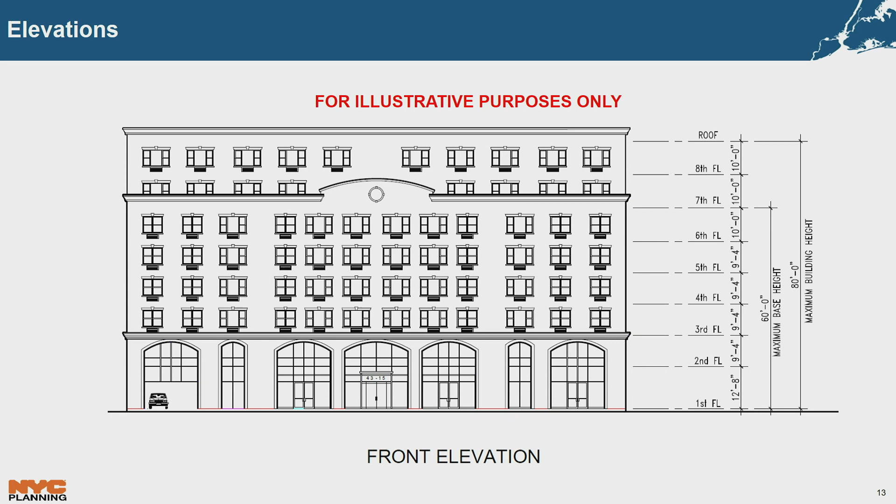The applicant is requesting to rezone the project area from R5B to R7A and expanding the C2-3 overlay from the north, south, and west onto the development site, onto the entire project area. The rationale for the R7A is to provide additional housing capacity and to serve as an appropriate step down from the higher R7X district to the south towards the R6 district along Roosevelt Avenue to the north.

The rezoning will increase the residential FAR from 1.35 in the R5B district to 4.6 in the R7A when mapped with MIH. The R7X district to the south allows a basic FAR of 5, 6 with MIH. The C2-3 overlay will allow commercial FAR of 2.0. The higher density is also proposed due to proximity to several public transit options and major arterials in the area.

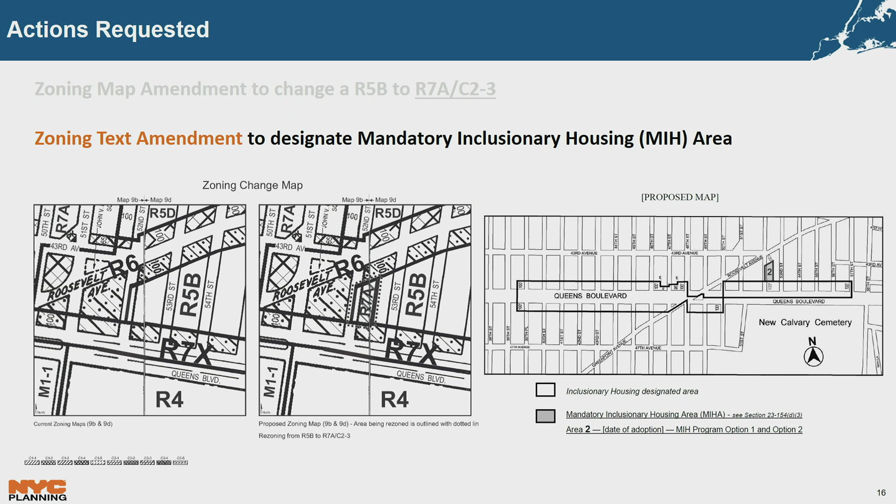The density allowed would serve to connect the major thoroughfares of Queens Boulevard and Roosevelt Avenue, also allowing for retail continuity between the two major streets. Applicants are proposing mapping both MIH options 1 and 2 for additional flexibility; option 2, which would require 30% at 80% AMI, is preferred. In conclusion, approval of the application will facilitate approximately 61 dwelling units, 15 to 18 subject to MIH, and allow for additional commercial uses. Thank you.

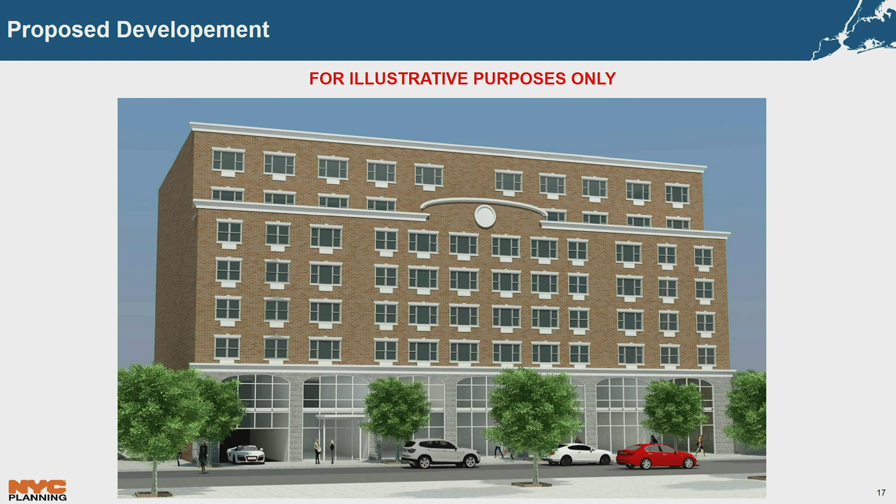Questions from the commission? Commissioner Ortiz.

I wanted to understand a little bit more about the justification for the commercial overlay. I noticed that the buildings pictured on Queens Boulevard have a vacant ground floor, and it was unclear what was happening immediately across the street. That's a church space, so the photo on the right is not updated—there is a physical culture establishment in the building on the right. The building on the left has a construction accessories shop for contractors; both are occupied, and the house of worship is still occupied by its congregation.

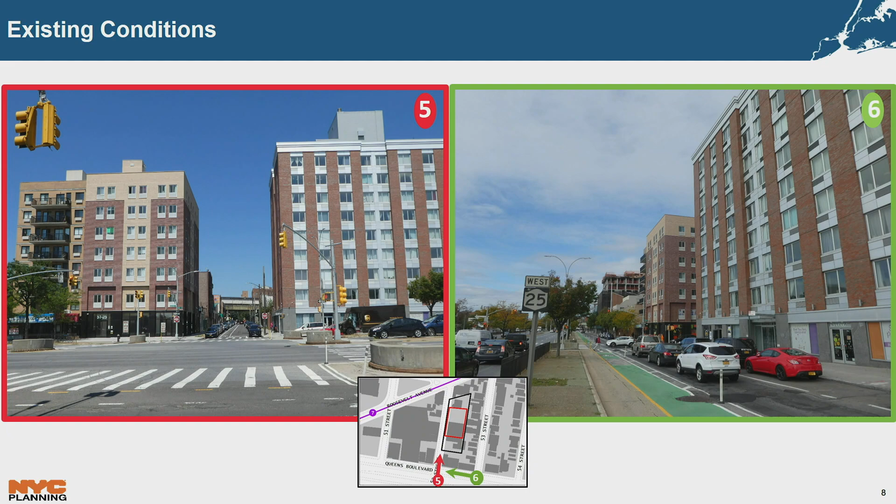I question a mid-block commercial overlay when we have very strong retail corridors established along Queens Boulevard and Roosevelt. They're hoping this would complement those existing retail resources and connect Queens Boulevard to Roosevelt Avenue. Across the street in the project area is already mapped C2-3, with existing proposed 6-story buildings under construction that would have retail on the first floor, which it would complement. The access to public transit is seen to connect to Queens Boulevard. I'd like to understand a little bit more about what is happening on those streets and the strength of the retail environment, because mapping more commercial on a mid-block—I'm not quite sure I understand the land use rationale yet.

Other questions? Commissioner De La Uz: when this comes back, they should talk about their rationale for mapping both options 1 and 2, given what the needs are in the local community. Okay.

Commissioner Rampershad: I was just curious, I noticed they have the handicap parking down in the cellar, but the parking at the rear is for retail—would they be providing handicap parking there? They'd be subject to ADA requirements; this is for illustrative purposes, so if required, they would provide it per the rules. I'm just curious why they wouldn't show it now, since it says parking for retail at the rear. I would assume they would show it.

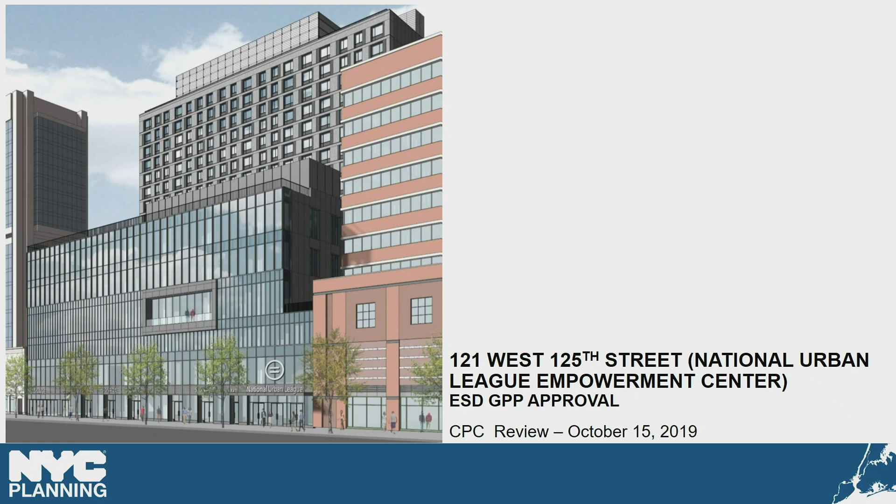Good afternoon, commissioners. So Empire State Development, ESD, is seeking a general project plan, or GPP, which was last modified in July of this year to override certain zoning provisions for a proposed mixed-use development in Central Harlem. The project site is 121 West 125th Street, which is in the special 125th Street district in Manhattan Community Board 10. So this is coming to the commission as ESD is seeking a response letter from city planning regarding these zoning overrides for their GPP. The applicant team with ESD is also working in partnership with the National Urban League, BRP, Taconic, and L&M.

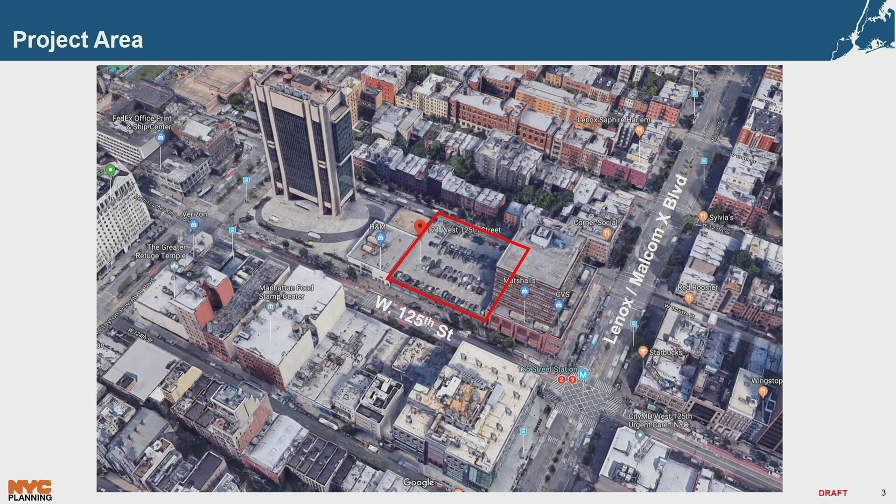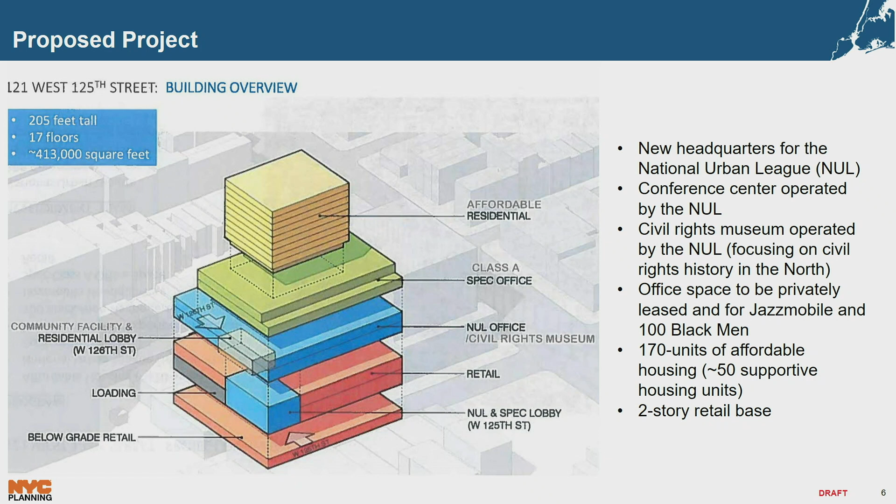So the proposed project is approximately a 410,000 square foot building that's proposed to be 17 stories or 205 feet tall, and would contain a large mix of uses, including a new headquarters for the National Urban League to return to their home in Harlem where they were founded over a century ago, a conference center which will be operated by the National Urban League, a civil rights museum also operated by the National Urban League, focusing on civil rights history, specifically in the North. Office space to be privately leased for specific organizations, some defined such as Jazzmobile and 100 Black Men, and some left to be Class A spec office space. 170 units of affordable housing, approximately 50 of which will be supportive housing units, and a two-story retail base. So to facilitate this development on the site, ESD is seeking the following zoning overrides through their GPP.

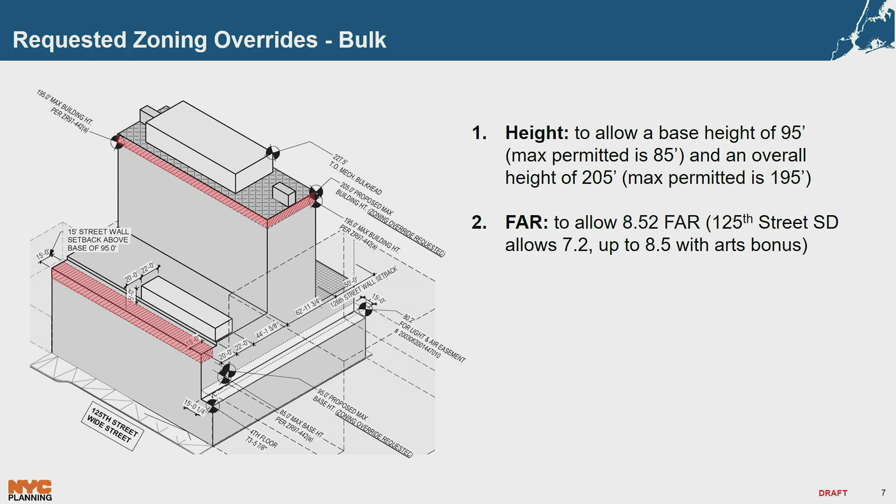The first related to bulk: they're asking for a base height to extend 10 feet beyond the permitted 85 feet to reach 95 feet along the West 125th Street wall, and also an override to increase by 10 feet to 205. Additionally, they're seeking an increase in FAR to allow 8.52 FAR. They are additionally seeking an override for the recess provisions in the zoning to allow a slightly larger recess along that facade for a more enhanced entrance for the National Urban League variety of uses. This can be seen better with this elevation rendering, where you see the pronounced entrance to have the National Urban League stand out amongst the other tenants.

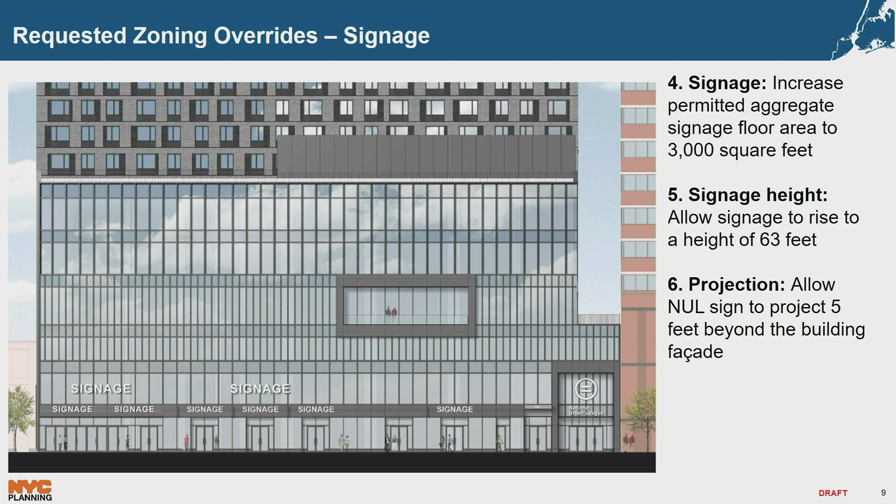Additionally, they are seeking some waivers to the signage provisions, including increasing the permitted aggregate signage floor area to 3,000 square feet, allowing signage to rise to a height of 63 feet along the facade, and allowing the National Urban League sign, a blade sign, to project 5 feet beyond the building facade. This is the best rendering we had to show that blade sign, which you can see here.

So in conclusion, city planning staff believes the requested bulk and signage overrides are reasonable for the wide mix of uses proposed, and the resulting building will be appropriate for the surrounding context and the intention of the special 125th Street district. The signage is very similar to what the Studio Museum at 144 West 125th Street received. However, in our proposed letter, which I believe you all received in the CPC package, we have added conditions that would restrict signage to the proposed height to ensure they are not seeking any rooftop signage, and also to ensure the signage will not be further illuminated or animated beyond what has been shown in our illustrative renderings. Overall, we believe the project will be an asset to the community and would like the commission to vote by assent on the support letter that was included in your package.

Thank you. Questions or comments from the commission? Commissioner Marin. Annie, so I understand the mix of uses and it's appreciated.

What I don't see here is a prominent entrance for the residential. So we have an entrance that says National Urban League, but I don't read where the residents enter. I believe the floor plan that was sent is quite small, but I believe this might be the residential entrance. I can confirm with them. I'm not 100% sure where that is.

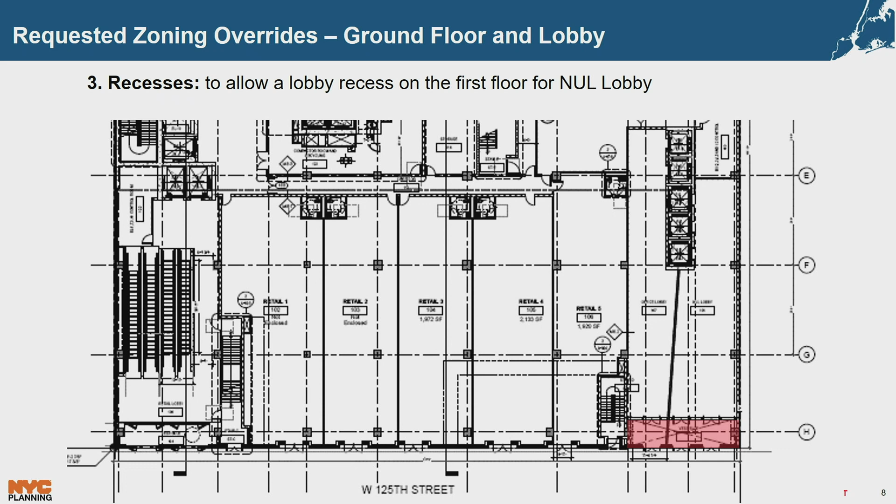Commissioner Ortiz: Hi, you spoke to some restrictions that you'd like to apply to the signage. Could you give us some background on the rationale?

Sure, this is really just clarifying the conversations that we've had with the ESD. They believe their proposal will not be seeking the things we're restricting, which is signage above 63 feet, such as proposed building top signage.

We just wanted to solidify that in the letter to ensure they wouldn't be seeking tower top signage. Additionally, they've shown some retail, the typical illumination of retail, and we wanted to ensure that with granting a fairly substantial increase in signage area—500 feet is permitted pursuant to zoning, and they're increasing that to 3,000—that wouldn't go increasingly beyond the illumination and animation we'd expect for this type of retail and occupancy.

I guess what is the concern about illumination or animation? What's the background on why that's an issue? I think it's from understanding that that 3,000 square feet could be quite large at this scale.

125th Street is a very animated corridor and already has a lot of signage, so that's sort of why I'm asking. I think there's just concern that we would be granting this waiver based on the proposal without actually seeing what that illumination could look like. Some increase in illumination could be good, but an entire animated billboard-type signage could be too distracting. We wanted to ensure that what the commission would be approving in this letter, they have an accurate portrayal of what that would look like before approving it.

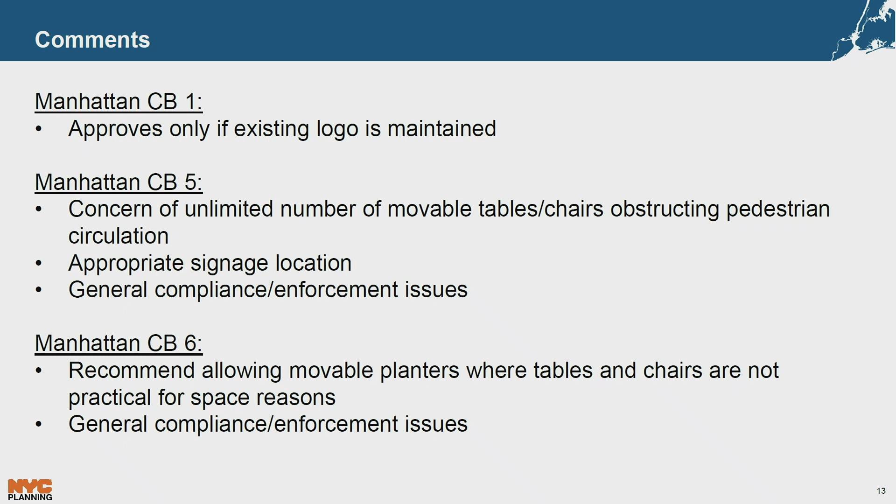For these compliance concerns raised by Community Board 5 and 6, I first wanted to point out that our still fairly new POPs website and map are really important tools for the public and community groups to know about all the POPs in their area and to understand what's required at them, and then be able to raise any concerns they have. We always encourage complaints and issues to be raised through 311, to be inspected, and we, as a department, work closely with DOB in providing data and clarifications on POPs requirements, so we will do our best to continue that. With that, I'm happy to take any questions or comments.

From the commission.

Commissioner Burney: When you roll out the new signage, who's actually physically doing that? Is that who actually does the work and how long will it take? The owner will have to hire, usually I think, a contractor who would actually put up the signage. But prior to that, with the departmental rule amendment, we have a time frame and a process for the owner to submit a signage package to us, which we'll review. Once they have that approved by the department, then they'll have, I believe, 90 days to put up the sign physically on site.

And are they required to do that? I mean, does the clock start ticking as soon as this is approved? As soon as the rule, which we're going to move in conjunction with the text amendment, is approved, yes. But again, we have time frames.